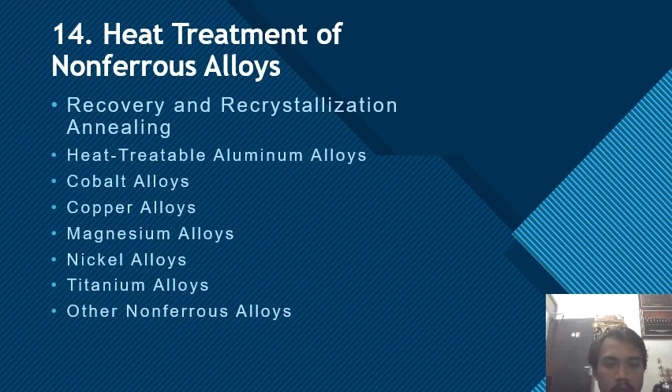The heat treatment of non-ferrous alloys. Non-ferrous alloys are heat treated to tailor their properties for a variety of purposes, including aiding in recovery by reducing internal stress, promoting diffusion by redistributing existing alloying elements, promoting new recrystallized grain formation, promoting grain growth, dissolving phases, producing new phases by precipitation from solid solution, altering surface chemistry by the introduction of foreign atoms, and promoting new phase formation through the introduction of foreign atoms. Heat treatment also is used to strengthen some non-ferrous alloys.

Strengthening of many non-ferrous alloys by heat treatment typically involves one of two metallurgical principles: precipitation hardening from the fine dispersion of second-phase precipitates that form in the metastable quenched single-phase alloy, as in Dr. Wilm's discovery with aluminum-copper alloys, and the two-phase non-ferrous alloys such as titanium-based alloys and high-zinc copper-zinc alloys, where strength can be obtained with a mixture of two phases of comparable quantity, unlike the two-phase structures developed in precipitation hardening, where the precipitate is a minor component.

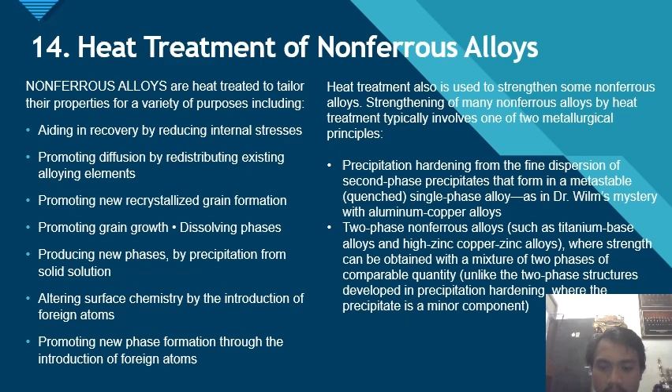We go to the first subchapter, recovery and recrystallization annealing. Annealing is a generic term used to denote a thermal treatment process that consists of heating a material to an aim temperature and holding or soaking it for a sufficient length of time at the temperature, followed by cooling at a suitable rate. When annealing is performed for short periods of time or at low temperature, the hardness of cold-worked alloy remains relatively constant. This initial stage is referred to as recovery annealing.

Thus, some properties do change during recovery annealing. For example, the electrical resistivity of an alloy is typically increased by cold working but can be recovered before annealing has significant effect on hardness.

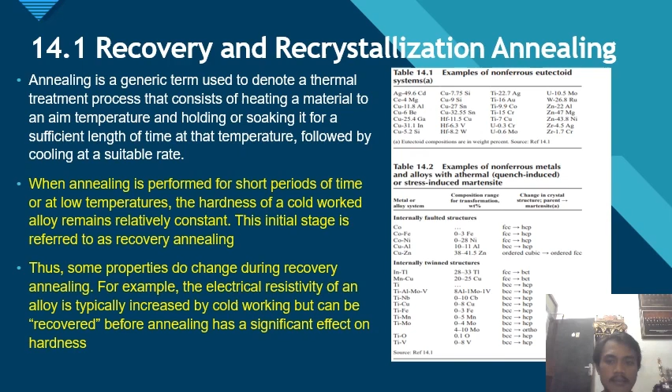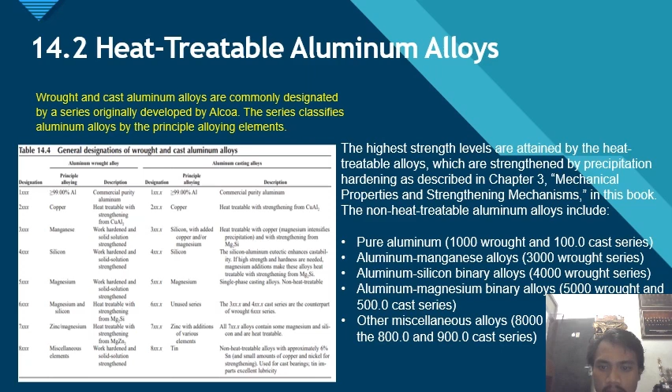Next, we go to the heat-treatable aluminum alloys. Wrought and cast aluminum alloys are commonly designated by a series originally developed by Alcoa. The series classifies aluminum alloys by the principal alloying element. The highest strength levels are attained by the heat-treatable alloys, which are strengthened by precipitation hardening as described in Chapter 3, Mechanical Properties and Strengthening Mechanisms. In this book, the non-heat-treatable aluminum alloys include

The next subchapter is cobalt alloys. Cobalt is useful in applications that make use of its magnetic properties, corrosion resistance, wear resistance, and/or strength at elevated temperatures. Biomedical application is another important use. The age-hardenable cobalt alloys include two CoNi-Cr-Mo alloys for corrosion resistance applications. One is alloy MP35N, UNS R30035, with a cobalt-rich composition of 35% Ni, 20% Cr, 9.75% Mo, and balance cobalt.

Following cold work, precipitates of Co3Mo form at platelet boundaries in MP35N alloy during age hardening. The other age-hardenable alloy is a more nickel-rich alloy with a composition of 36% Co, 19% Cr, 7% Mo, and balance nickel.

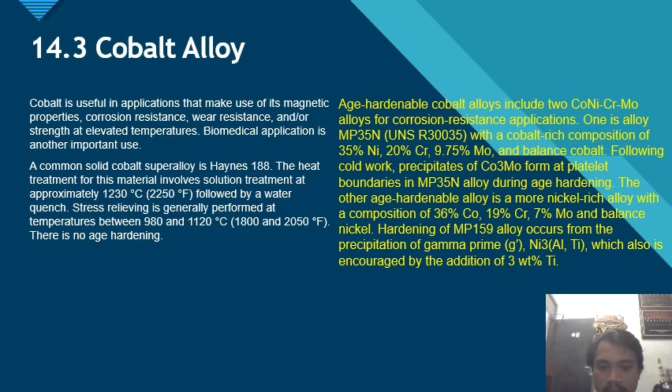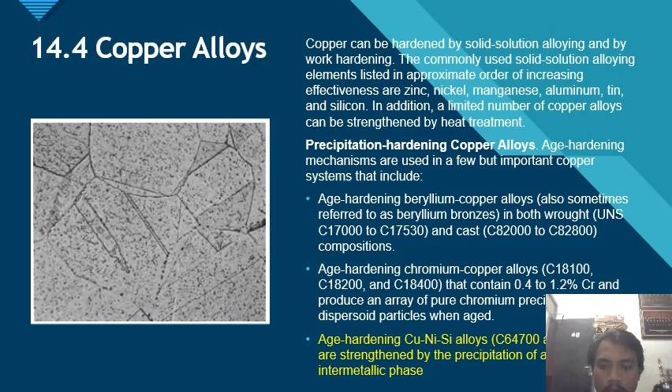Next, we go to the copper alloys. Copper alloys can be hardened by solid solution alloying and by work hardening. The commonly used solid solution alloying elements, listed in approximate order of increasing effectiveness, are zinc, nickel, manganese, aluminum, tin, and silicon. In addition, a limited number of copper alloys can be strengthened by heat treatment. In the precipitation hardening copper alloys, age hardening mechanisms are used in a few but important copper systems that include age-hardening beryllium copper alloys, age-hardening chromium copper alloys, and age-hardening Cu-Ni-Si alloys.

In the magnesium alloys, the basic temper designations used to designate the various types of heat treatment of magnesium alloys include F as fabricated, O annealed, recrystallized, H strain hardened, W solution heat treated, T2, T3 solution heat treated and cold worked, and others.

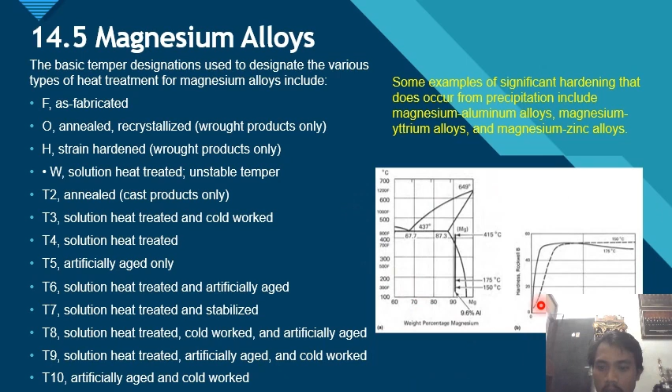Titanium alloys are heat treated in order to reduce residual stress developed during fabrication, stress relieving; produce an optimum combination of ductility, machinability, and dimensional and structural stability, annealing; increase strength, solution treating and aging; and optimize special properties such as fracture toughness, fatigue strength, and high temperature creep strength.

In the microstructure of titanium alloys, generally two types of alpha phase may be present after heat treatment. Primary, which persists through heat treatment as the remnant from prior hot working or processing. Secondary, also referred to as transformed beta, which is produced by transformation of beta to alpha during or after heat treatment.

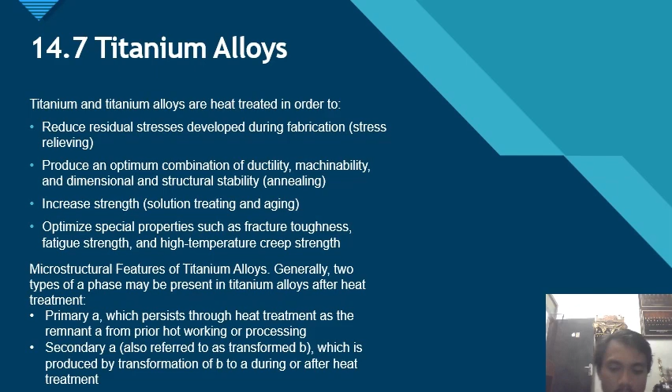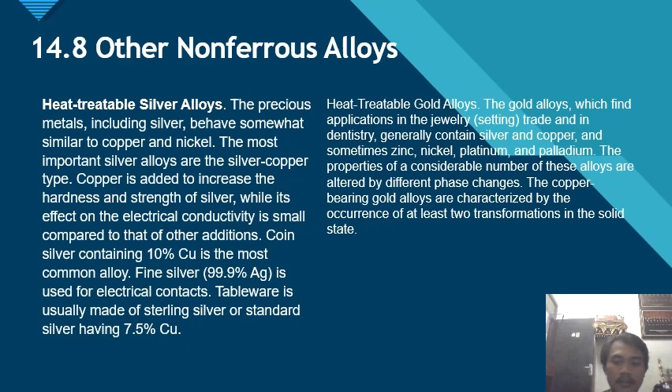So that's all my presentation.